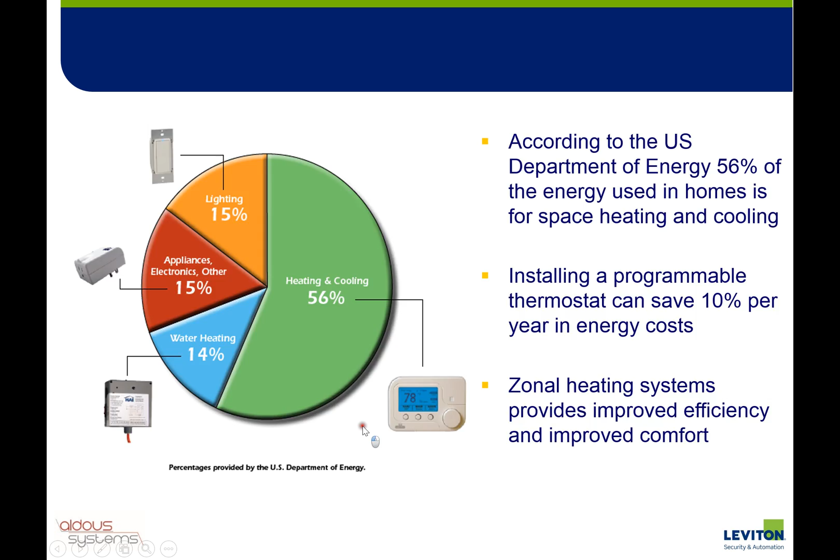With the Leviton system, we can pretty well cover any type of heating solution, from underfloor heating, radiators, air conditioning, and regardless of the type of heat source, be it a traditional gas or oil boiler or air source or ground source heat pumps. So it's very flexible, not come across a situation yet that we're not able to cope with. And what's also very nice is we have a really good solution both for new build and for retrofit, where you can actually fit this in existing properties without the need to run lots of cables and replumb the place.

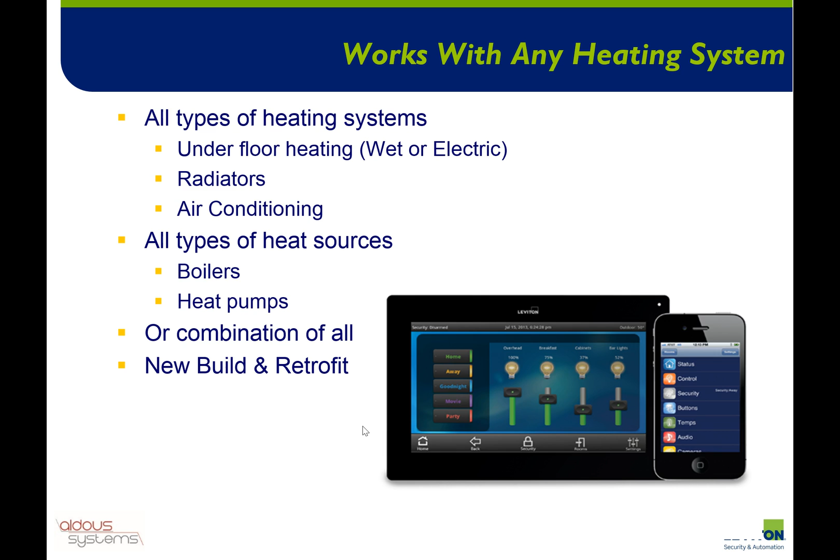So we're going to go through a couple of different scenarios here. First of all, we're going to look at underfloor heating, which is the most common for any sort of new build or extension, or you may find some projects have got a combination where maybe a large extension is being put in and underfloor heating is used in the new bits, and you've got radiators in the old bits, and obviously you can mix and match these different scenarios as required. And if you do that, you still present the user with a common user interface, either from the smartphone app or the touchscreen, regardless of what technology is being used to heat that zone. It gives the user a common look and feel, which is nice.

So focusing on underfloor heating, typically we'd use this RC1000, which is this device here. It really is a complete energy management module, including a thermostat and timer clock. Typically that's located within the manifold cupboard, adjacent to the manifold, and can control the manifold actuators directly. There is a 24 volt AC output on the back of this unit, and if you stick with 24 volt AC heads on the manifold, you can wire it directly. All manifold manufacturers offer 24 volt AC or 240 volt AC heads on the manifold.

Most UK plumbers will naturally go towards 240 volt heads or actuators, so you need to get in there early and make sure the underfloor heating company use 24 volt AC to make your life as easy as possible. If you have got 240 volt heads, it's not a big deal. They are extremely inexpensive items. Just to whip the 240 volt ones off and replace them with the 24 volt ones is easy to do. It doesn't require draining down the system. They are external to the water containment. They just literally unscrew. Really easy to do.

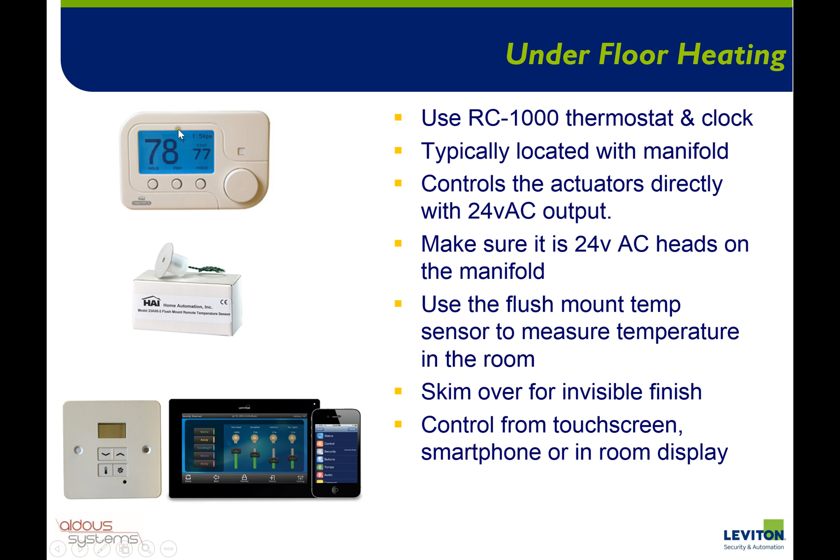And then, of course, individual room control can be gained from the touchscreen or the smartphone app. Or if you do want a temperature display in room, then we have got this temperature display faceplate available in a number of finishes, and this can show you the current temperature, and you can adjust the heat set points and change modes and that sort of stuff on the RC1000. And again, that wires with Cat5 back to the main RC1000.

Looking at wiring here, so here you can see this is my underfloor heating manifold down here, and it's obviously a 4-zone manifold, so there's 4 actuators, and you mount the RC1000s above the manifold and wire directly off the back of the RC1000 onto the actuator to be able to open it and close it.

Obviously each RC1000 has current temperature and a heat set point, and when the current temperature goes below the heat set point, it applies 24 volt AC and the actuator opens and allows hot water to flow in the underfloor heating. And when the current temperature reaches the heat set point, then it closes the actuator and stops the hot water flowing under the floor. So that's fairly straightforward, one of those for each zone.

And the RC1000s cable back to the Omni controller. It's actually on a bus network, so one Cat5 from the controller to the first RC1000, and then you can daisy chain them, or they can all star wire back and they all go to the same terminals. But when they're all in a row like this, it's simple just to run one Cat5 to the first one and then daisy chain them across. Obviously, if you've got multiple manifolds, say one on each floor, then just run a Cat5 to each manifold cupboard.

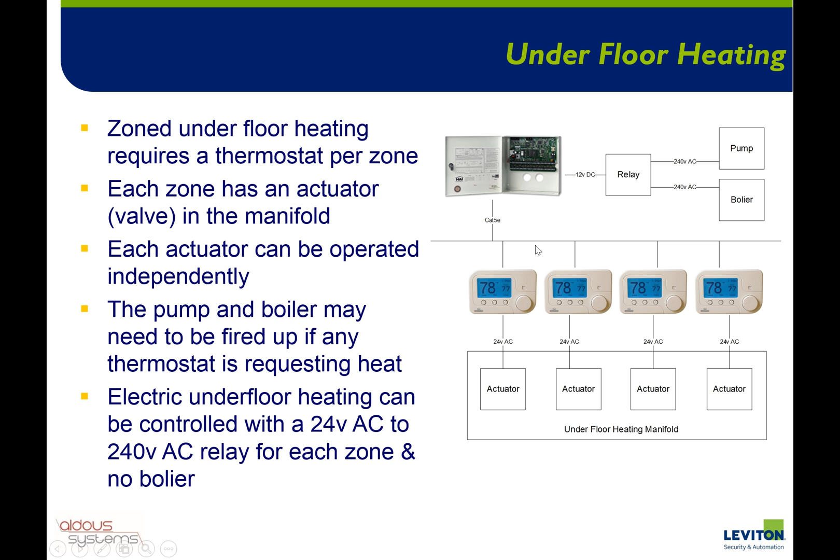Going to talk now about simple, perhaps more traditional heating with radiators. So if the house has basically just got a boiler and say 8 radiators, then again you can use the RC1000 to control this and measure the temperature. Typically in that scenario you might mount the RC1000 in the hall or the landing, and it's got its own built-in temperature sensor, and you don't need the remote temperature sensor. You can just have the RC1000 on the wall, and it's measuring the temperature, and the relay can be used to turn the boiler off and on.

However, if you do want to hide the RC1000 in a cupboard somewhere, then absolutely no problem using the remote temperature sensor. And indeed, you could actually have up to 4 remote temperature sensors wired back to one RC1000, and it'll take an average across all 4 of them. Let us know if that's what you want to do, and we can tell you how to wire that. It basically involves wiring 2 in parallel, and then each leg has 2 sensors, so you can get 4 of them dotted around the house, which is quite a nice little feature.

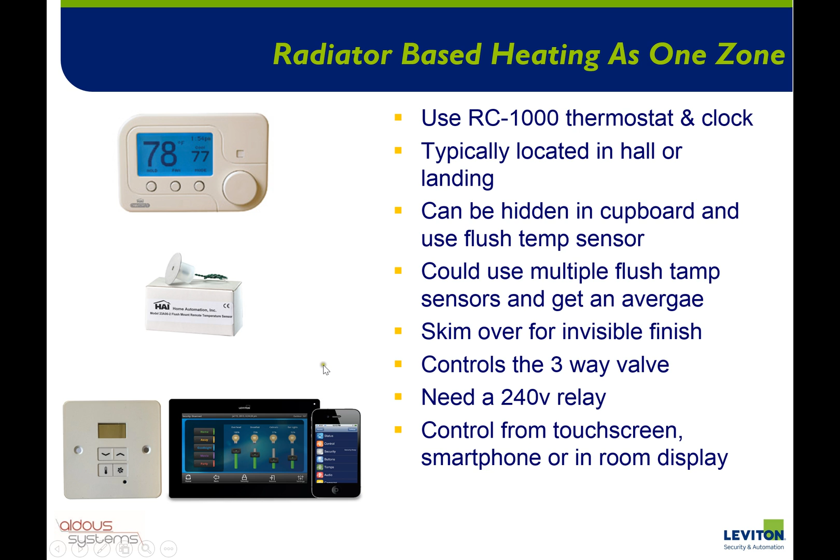So this is kind of a wiring diagram showing how you do this. Most typical installation of a radiator-based heating system has one of these things here, which is called a three-way valve. Makes our life quite a lot easier actually, because you simply put 240 volt on one of the cores of this cable, the valve opens, and then the way it's normally wired by the electrician is there's an end switch which then livens up the pump and the boiler for us. So we actually haven't got to worry about the pump and the boiler. That happens automatically as a result of conventional wiring.

If you speak to the electrician, he'll know exactly what you're talking about. Most electricians have wired in central heating systems, so you just need to put a relay between the 24 volt AC output on the RC1000 and the 240 volt, to be able to switch a 240 volt through to the three-way valve, and once that's been livened up, your boiler and pump fires up, and then hot water flows through the radiator. Of course, when the current temperature reaches the heat set point, the relay switches off and the valve closes and the boiler and pump shut down. So that's pretty straightforward.

And again, as I mentioned earlier, you may have a property where you've got a combination of both, where you may have radiators in one area and underfloor heating in another area, and that's absolutely not a problem. Just combine the two together.

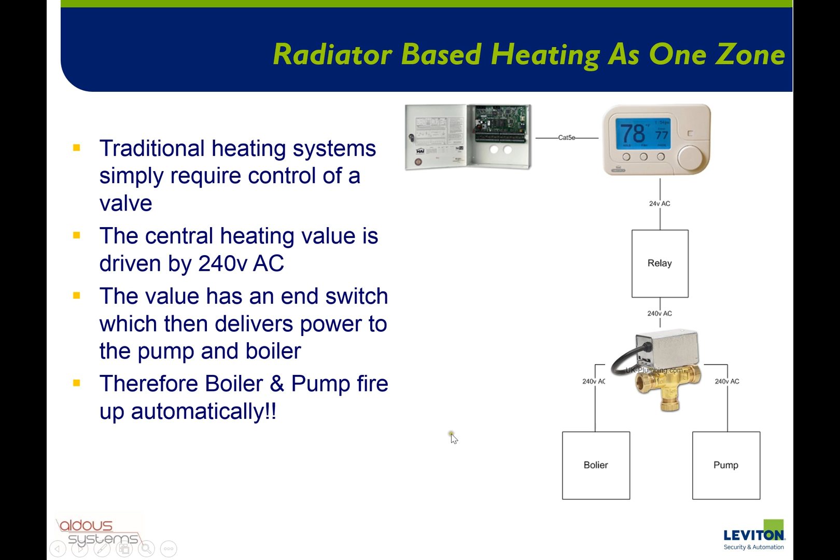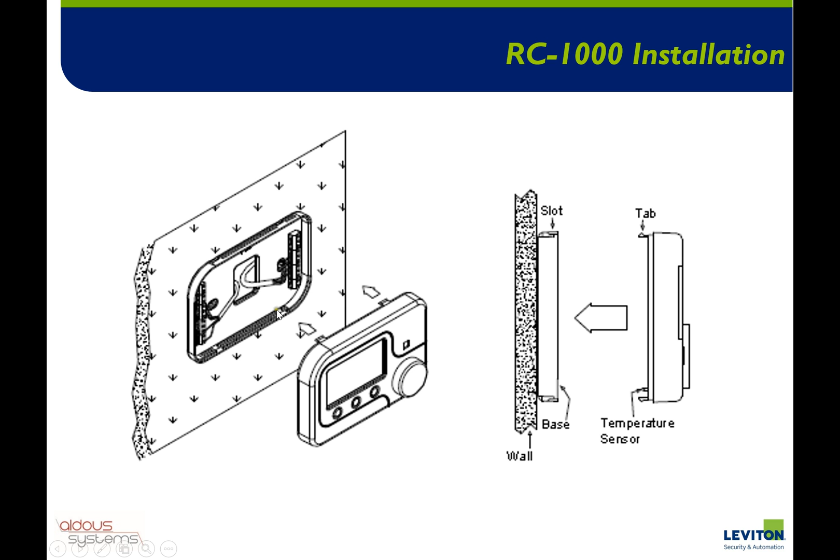The RC1000 itself, from a physical installation point of view, snaps open into 2 bits, where you have a back plate here, the wiring center as it were, that you mount on the wall, and then the front bit will snap over the top of it. And there are 2 connection blocks on the back plate, one on the left and one on the right. The right-hand connection block is used for connecting back to the main controller.

I mentioned in the introductory video that all the thermostats, up to 64 of them on an Omni Pro 2, you lose 1 zone and 1 output on the controller. So it's three conductors that provide all the telemetry from the thermostats back to the controller, so you can go from the controller to the first thermostat and then daisy chain each one, and each thermostat has a unique ID that you set from the menu. So if you've got multiple thermostats, make sure you set the IDs accordingly.

The left hand screw down terminal block on the RC1000 back plate requires 24 volt AC power on pins 1 and 3. That powers the thermostat, and then you've got pin 6, 7 and 8, and really we mainly tend to use pin 6. Basically pin 6 goes live when the thermostat needs heat, and it's switching a 24 volt AC through to pin 6.

So pin 6 can go to your relay to provide 240 volt to the three-way valve in the radiator example, or pin 6 can go to the actuator to liven up the actuator on the manifold, again when the thermostat needs heat. Obviously it's 2-wire, it's pin 6 and the common to make an AC circuit.

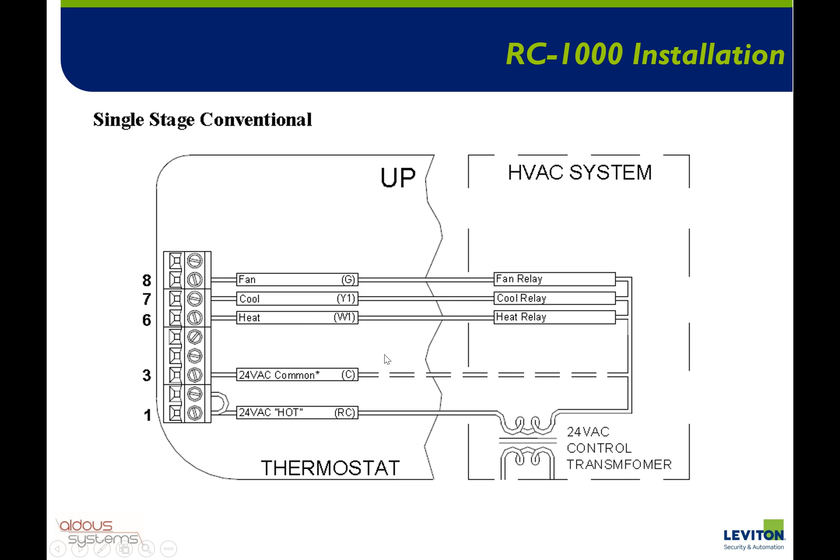Okay, now we're going to move on to retrofit solutions, which I find quite exciting. This gives you the opportunity to provide app-based and intelligent heating control in existing properties without having to rewire or replumb them. This thermostat here can really just be a complete one-for-one replacement of your traditional thermostat. Normally in most properties there's a little thermostat of some form on the wall, and that's got a little 240 volt switch in it, which switches a live feed to that three-way valve we were talking about earlier. You can pull that off the wall and replace it with this thermostat.

This has also got a 240 volt relay in it. Mount it on the wall, wire the switch live into the back of it, and you can set the heat set point, and when the current temperature falls below the heat set point, that relay becomes live, switches 240 volt to the three-way valve, and your boiler and pump fires up and heats up the house. When it gets to temperature, relay goes off, pump and boiler go off. Very, very simple. The nice thing about it, of course, is it has Zigbee wireless. Now, Zigbee is a very robust wireless technology, which allows it to communicate back to the Omni controller.

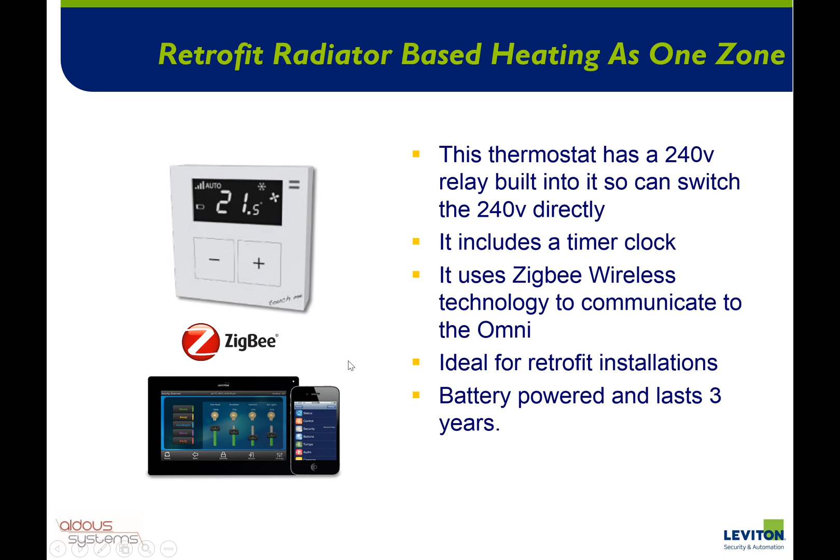Okay, just looking at wiring, then here you can see our three-way valve again with the boiler and pump, and again, as I mentioned, all we're doing is applying the 240 volt we need to the three-way valve. 240 volt on, pump and boiler fires, radiators heat up, and we use wireless to talk back to the Omni to give you control of that thermostat from smartphone or touchscreen, and from a programming point of view. Great little retrofit solution, easy to put in anyone's house, and every home should have one.

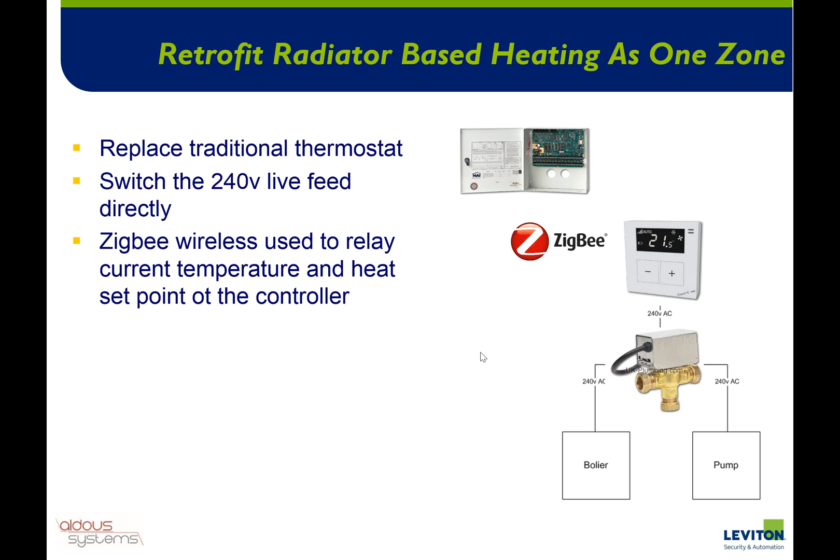Now, if you want to get a bit more efficient and improve the flexibility of the system, then you really want to zone the system up. Because obviously the previous example is treating the whole house as one zone. Your heating's on or it's off. And it doesn't give you room by room control. This retrofit solution does. This uses a Zigbee wireless radiator valve, also known as a TRV, a thermostatic radiator valve. Basically, you can fit these to the radiators.

You may have seen TRVs before, where you have a little white knob on the end of the radiator that's labelled 1 to 6. And they're not particularly useful or user-friendly. They tend to be fairly binary, to be honest. Sort of 2 and below is off, and 2 and a bit and above is kind of on, and there's no real individual control there.

Well, you can actually just unscrew those and screw this radiator valve on. Doesn't require you to drain the water down. Again, it's outside the water containment of the radiators. You unscrew it and then screw this guy on. Again, it contains a couple of batteries, which again last about 3 years. And the device will connect via Zigbee back to the Omni controller and show up as a thermostat. It'll give you a current temperature reading for that room, and of course a heat set point.

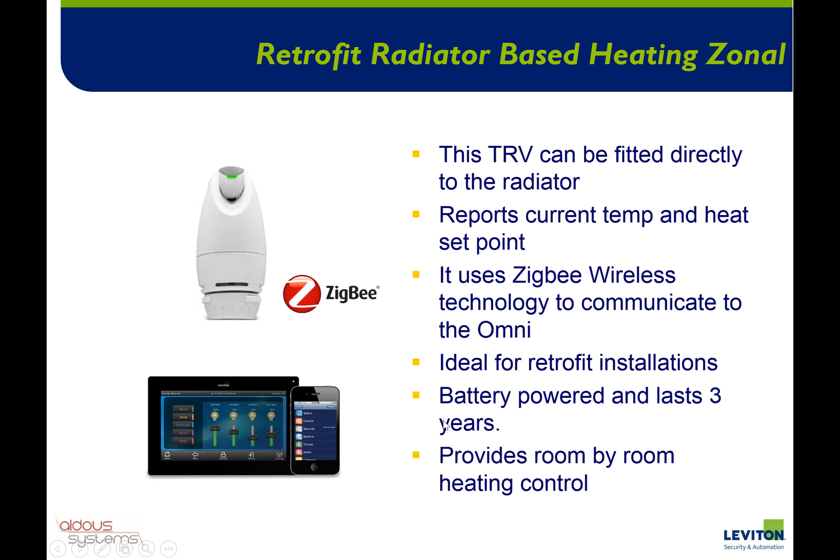And if you have guests come around, then you can just ask them, what temperature would you like your room to be, and pull out your phone and set the temperature accordingly. So brilliant solution. Big fan of this. Obviously you need a TRV for each radiator. So 8 or 10 radiators in the property, you fit a TRV on each one.

And it uses Zigbee to talk back to the controller. And now, of course, we do still need to turn the boiler off and on as required. So again, we use an output into a 12-volt relay to control the pump and boiler. And then if any of the TRV's current temperature is below the heat set point, we turn the boiler and pump on. And of course that water will only go through the radiators where the TRV is open, so it's only going to be sending the hot water to those locations that need it.

And of course when all the TRVs have reached the heat set point required, then they will close, and you can obviously turn the boiler and pump off. No need to run the boiler. Great device. They run very silently, so no problem putting them in bedrooms. They don't make a whining noise or anything. You almost have to put your ear hard up against them to hear the little motor opening the valve and closing it.

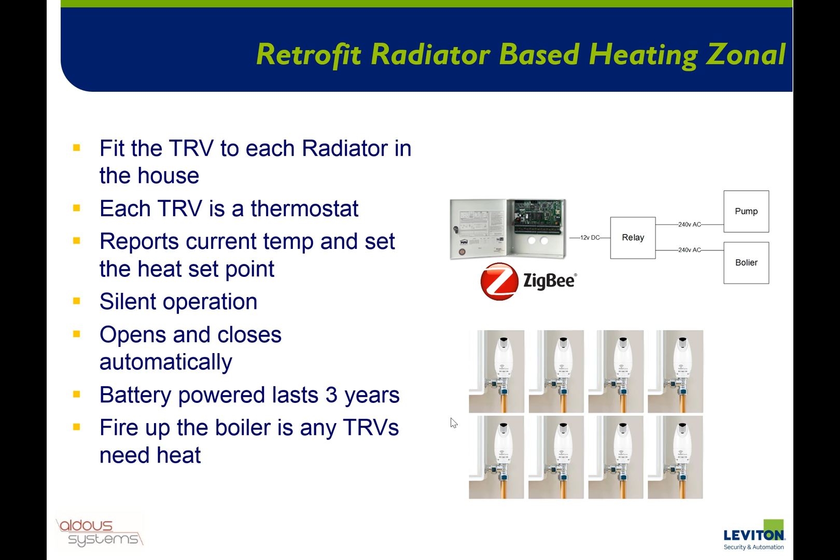Yeah, brilliant solution. You can probably tell I really like this solution. It's great, and definitely would recommend using this in as many situations as you can. Certainly, even if you just sell an Omni as an intruder alarm, there's a great upsell there. You can speak to the customer. Do you want zonal heating control, also controlled from the same smartphone app that your alarm system is controlled from? Who wouldn't want that capability?

Still in the retrofit space, you might find it difficult to get a cable from where the Omni is to where the boiler is. If that's the case, not a problem. We've also got a Zigbee wireless 240 volt relay. This will allow you to apply the 240 volts to the boiler where it needs to be to turn the boiler on without having to run cables to it.

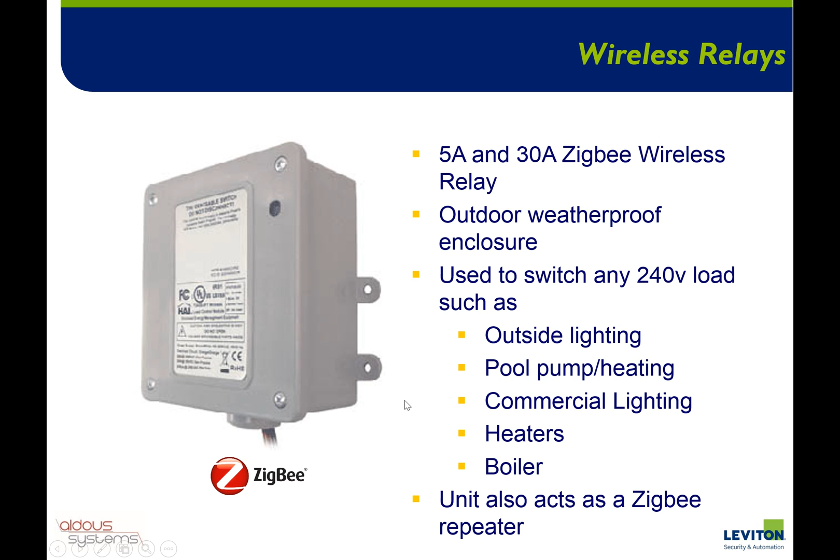We have two versions of this, a 5 amp and 30 amp version. Obviously a boiler isn't going to draw much current, it's just a switch, so the 5 amp version will be fine for that. And basically it sits on the Zigbee network. This is a powered Zigbee device, so this will act as a repeater as well. But other applications, outside lighting, pool pumps, pool heaters, commercial lighting, commercial heaters, anything where you need to switch 240 volt and you can't get a cable to it is where you can use the Zigbee relay. So very useful piece of kit for any of those applications.

I mentioned that powered Zigbee devices are repeaters. So our wireless battery-powered thermostat and our wireless battery-powered TRVs are not repeaters. That would drain the battery too much. They're known as endpoints. If you have a large property and you need to boost the range, then this little chap is very useful. It is a Zigbee repeater. So wherever you've got a power socket, you can plug one of these in and it will repeat the Zigbee signal, giving you larger range.

So if you've got a TRV that's just too far away from the main controller, pop one of these in a power socket somewhere between the two and it will repeat the signal. And what will happen is multiple TRVs will find the repeater and then hang off of the repeater, which makes the network more efficient and more robust. And it's also a 13 amp relay as well. So anything you want to switch off and on with this can be controlled from the Omni, such as, for example, lights, lamps.

I know certain people use them to isolate things like tumble dryers and washing machines that do get quite hot and have been known to start fires. So by putting one of those on the tumble dryer, when you arm the alarm at night in night mode, you can kill the power to the tumble dryer so that it can't possibly burst into flames.

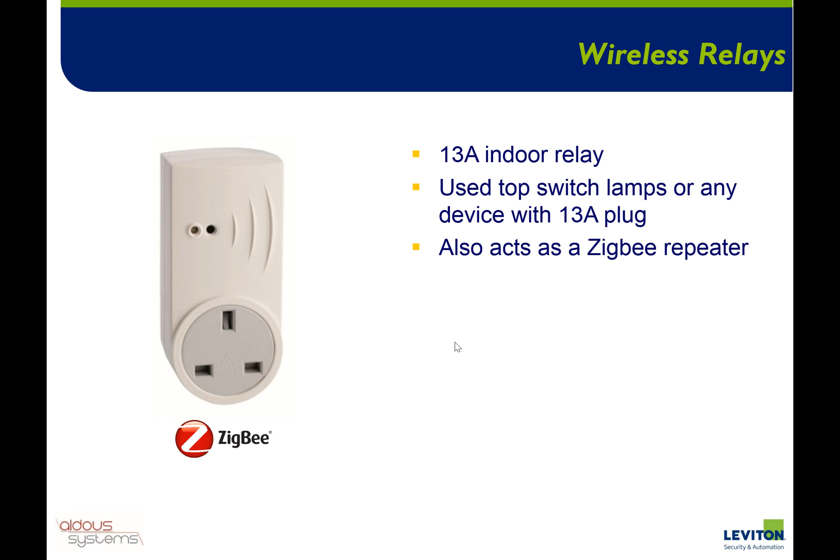You can locate it wherever you like, get it nice and central in the house. Over a Cat5, you can go quite happily up to 100 meters because RS485 goes quite a long way. So you need one of those plugged into a serial port. Set the serial port to ZIM. And then you've basically Zigbee enabled your Omni for any of those Zigbee devices you want to enroll into the system.

I mentioned air conditioning earlier on. We absolutely have the ability to integrate air conditioning systems as well, very easily using the Coolmaster. The Coolmaster device plugs into one of the serial ports on the Omni, and allows any air conditioning unit to show up as a thermostat. So again, it gives you a current temperature, and a heat set point or a cool set point. Most air conditioning units nowadays can heat and cool, so you can control them easily and seamlessly from the Omni.

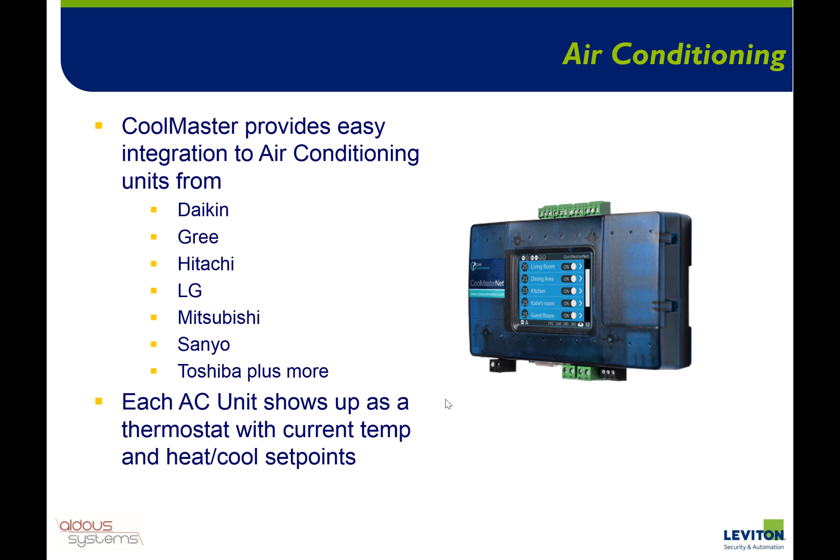There's a 2-wire bus that runs between air conditioning units, and wires into the Coolmaster, and the Coolmaster connects via a serial cable to the Omni controller. And then you can enroll each device into the system as a thermostat and control it as easily as that. So you literally just need this one piece of hardware, and it covers pretty well every make of air conditioning system out there. So really easy to integrate.

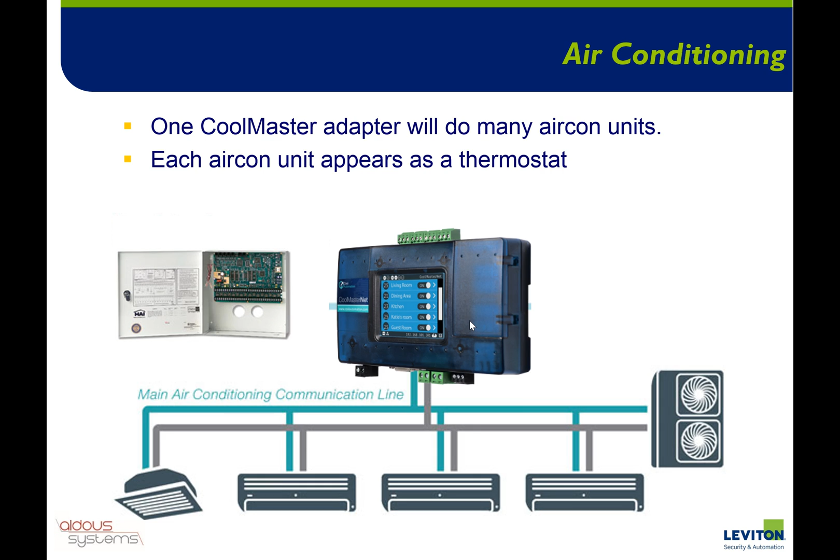Additionally, we have some other items I thought I'd just mention, so you get a full view of everything. We do have a temperature sensor. This can either go indoors or outdoors. It's quite nice to actually fit one of these outdoors. Stick it under the soffit, so it's not in direct rain. But the printed circuit board is coated, so it's not going to go rusty or go green or anything.

And that can give you the ability to measure the outside temperature, which is quite nice to show on the touchscreens. The customer can see the outside temperature, and indeed you may make some automation decisions based on the outside temperature. So not a bad idea to throw one of those into a project. But as always, there's more than one way to do something. I have known installers fit the temperature sensor in each room for temperature measurements in each room.

It's a lower cost device than the OmniStat, which is the RC1000 we talked about earlier. No reason why you can't use this if budget is a real concern. Obviously you can't make it invisible, and there's no display on it, but it does give you a current temperature, and you can set a heat set point, and then you could use outputs on the controller to open and close the manifold heads. There's no one solution fits all, so you could have a combination of things. I have known installers use this quite successfully for a budget heating control solution, because they're relatively inexpensive.

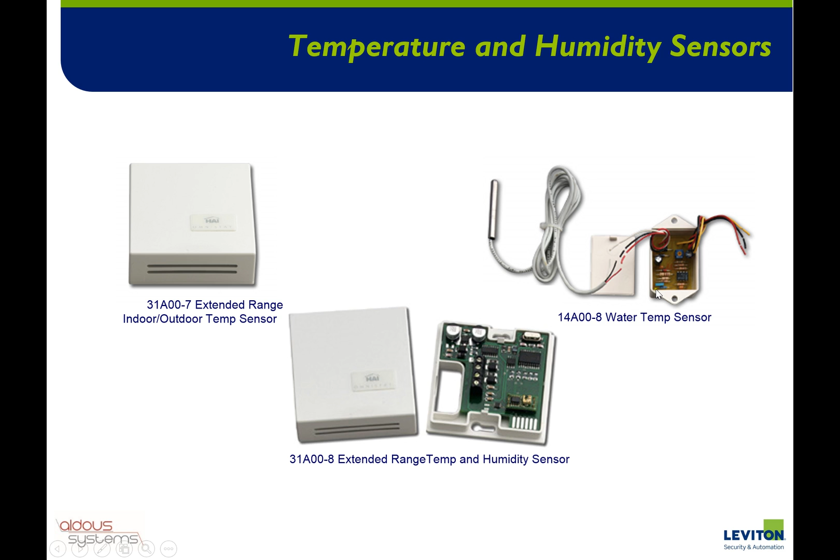Okay, we're going to have a quick look at PC Access now and what's involved in programming the system for your temperature and energy management. So if we're looking at the Setup tab over here, if I click on Thermostats, really all I have to do is name my thermostats.

So here you can see I've got 6 thermostats in the project: kitchen, dining, lounge, study, hall and upstairs, and all I've done is I've clicked on here and typed in its name. That's all I've had to do to tell it basically it's a thermostat. The system basically, when it sees a thermostat with the default name, it assumes it's not being used. So by changing the name is how you tell the system there is a real thermostat there.

Voices, I can give the thermostat a voice as sort of demonstrated before just by doing that. This is really a bit of legacy, to be honest, where people use the telephone dial-up facility to control the system. This is where you may say, press 3 for thermostats, and then it reads out, press 1 for the kitchen thermostat, press 2 for the dining room thermostat. But no one really tends to use that voice dialing capability anymore because we have the smartphone app. But just in case you need to use that.

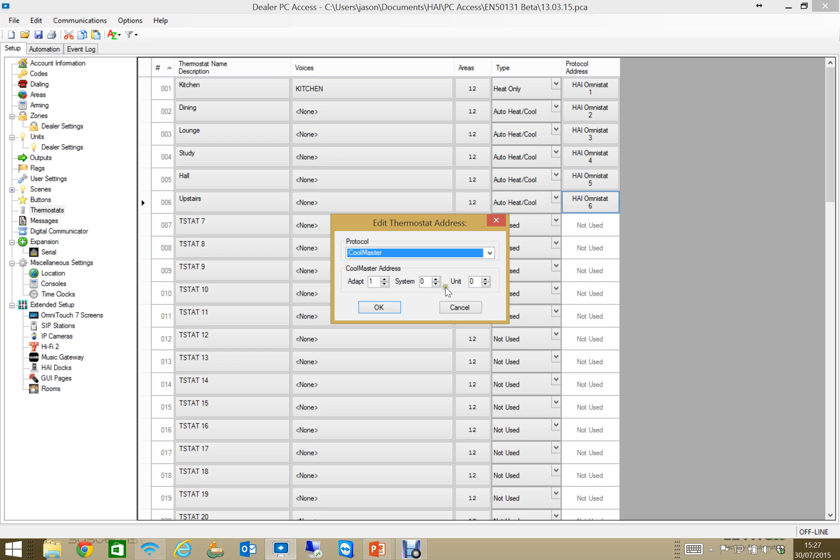If you are using Zigbee or the Cool Master, I'm just going to pop over to the serial ports. Don't forget, if you're using Zigbee and you've used a ZIM, you need to make sure you've set the ZIM to a serial port where the function is set to Zigbee. And if you're using Cool Master on that serial port, then you need to make sure you set the function to Cool Master on the appropriate serial port. And of course, you can have Zigbee and Cool Master using multiple serial ports.

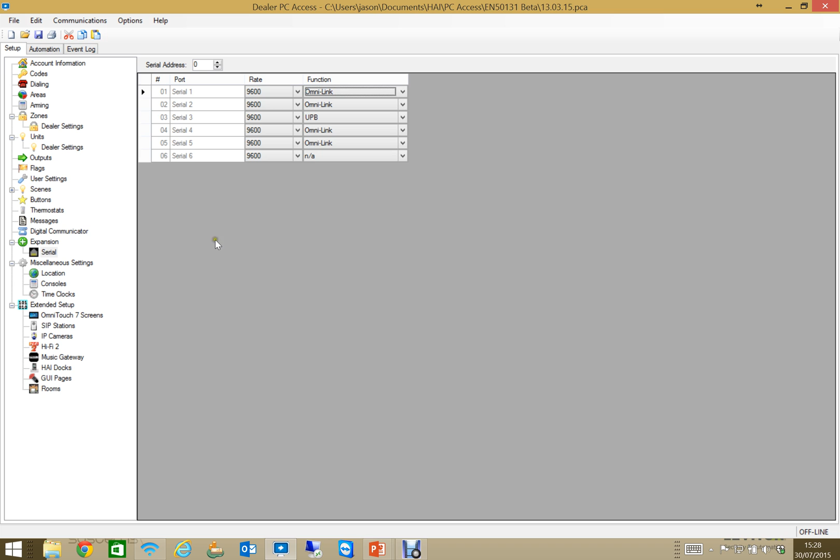Okay, we're going to look at a quick bit of programming now, because one of the things I said earlier was that when you're doing your heating control, you need to manage the boiler. And if any of the thermostats need heat, you've got to turn the boiler on. So how do you do that? I'm just going to jump into automation programming and add some programming to show you how that's done.

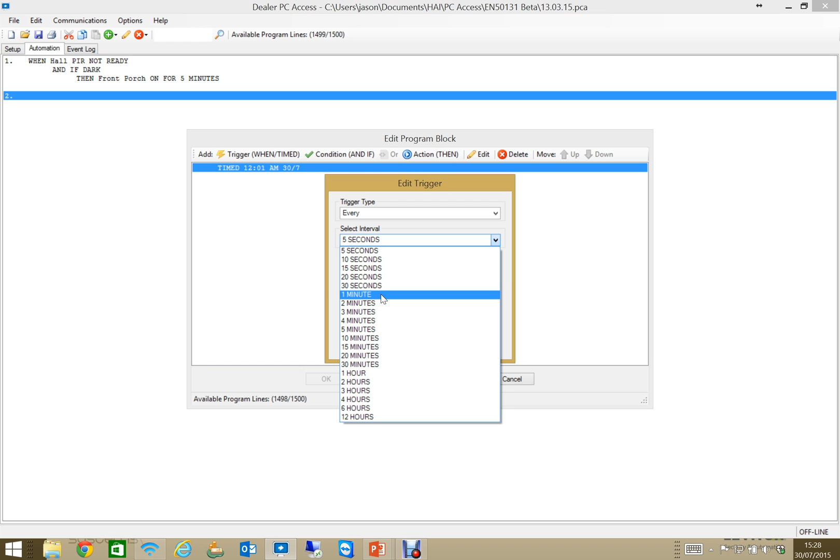As with all programming, we start with triggers. Now with this one, I'm going to use a cheeky little trigger, which is very handy, called every. We basically have the ability to do something every period of time. So I'm just going to say every minute.

And what I'm going to say is every minute, check my thermostats, see if any of them need heat. If so, turn the boiler on. That's what we're going to do. So the trigger is every minute. My condition:

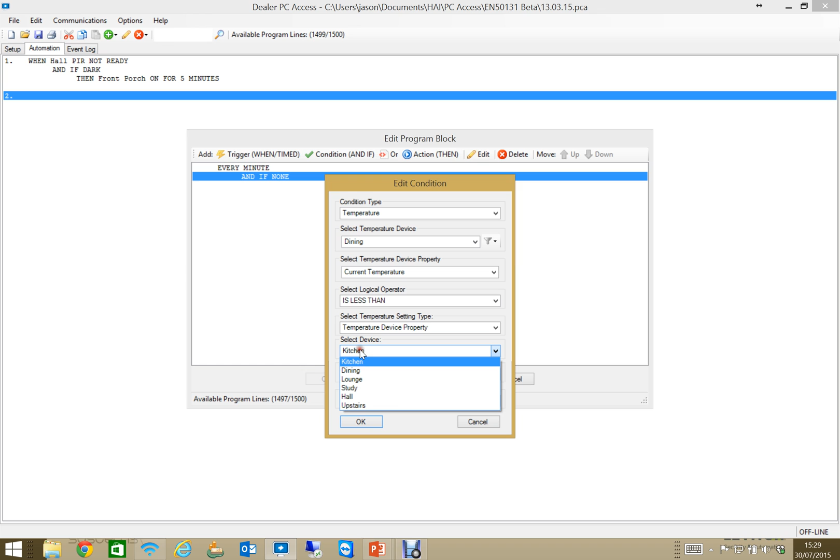I can go to temperature, select the first thermostat, which is the dining room, and if the current temperature is less than, now here I've got specific properties, and temperature device property is what I want, and it's the dining room thermostat we're doing here. So if the dining room thermostat current temperature is less than the heat set point, let's say by 1 degree. So if the dining room thermostat current temperature is less than the dining room heat set point, then we want

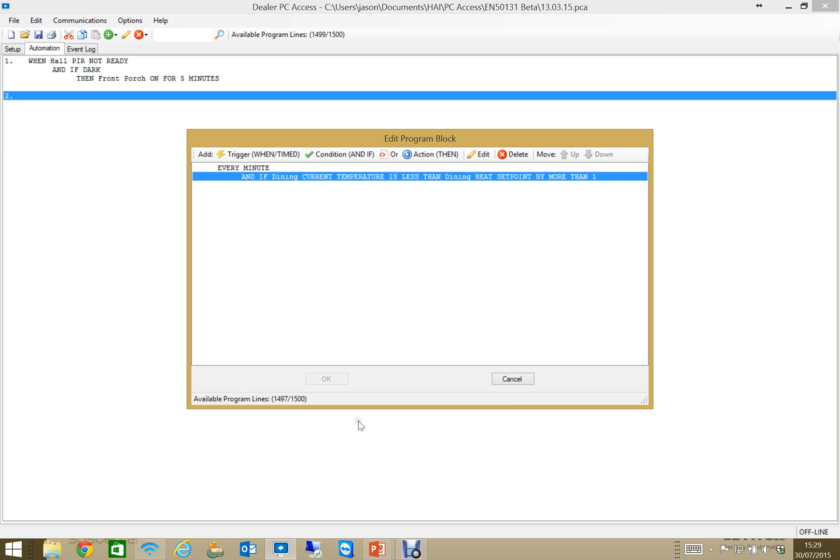the boiler on, right? But I want to do that for each of my thermostats, and it's an OR. So I've clicked the OR button to put an OR statement in here, and now I can do the next one. So temperature, hall, current temperature is less than the hall heat set point by 1 degree.

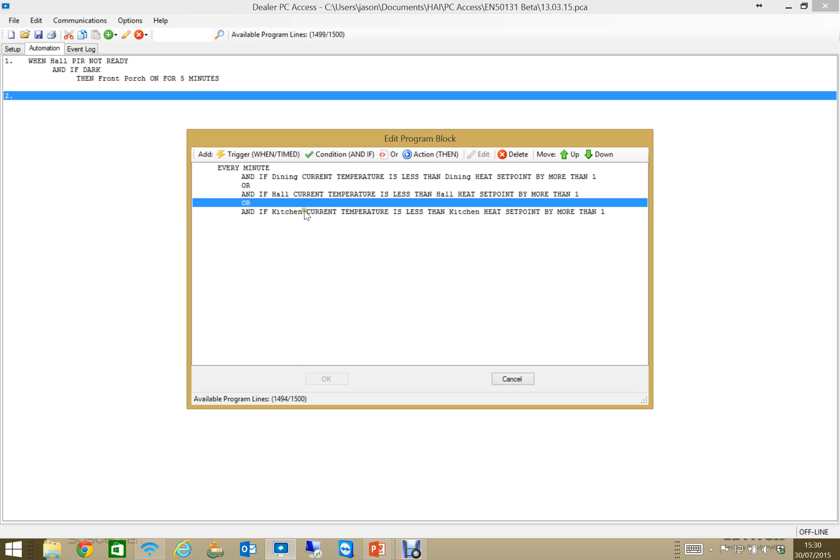And if the temperature for the kitchen current temperature is less than the kitchen heat set point by 1 degree, well, obviously you can choose what you want to do there. And I forgot to put my OR statement in here, so I'll just pop that in afterwards. And there's my OR statement again. I'll just do one more for the purposes of this exercise.

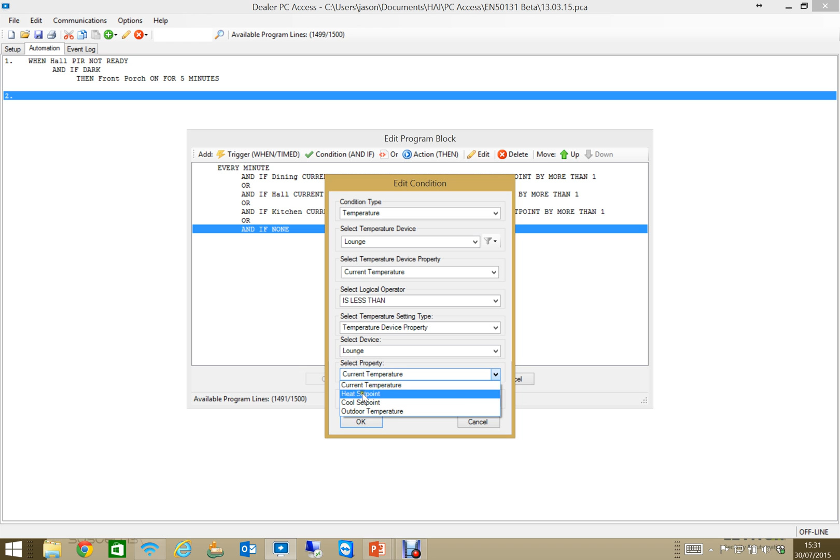Temperature, so we've done the dining room, done the hall, done the kitchen, we'll just do the lounge. Current temperature is less than the lounge heat set point by 1 degree. The action is going to be to turn the boiler on. I've got the boiler under an output. So I've got one of my outputs through a 240 volt relay, and there it is. There's my boiler. I'm going to turn the boiler on.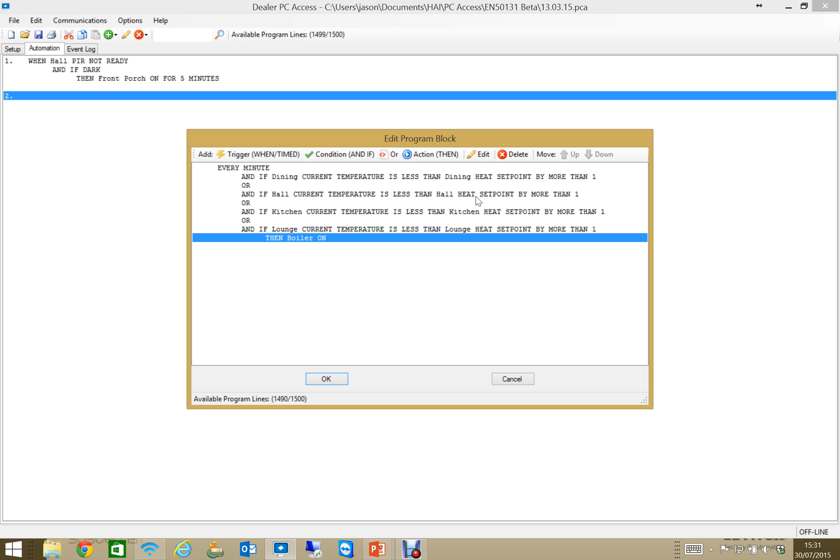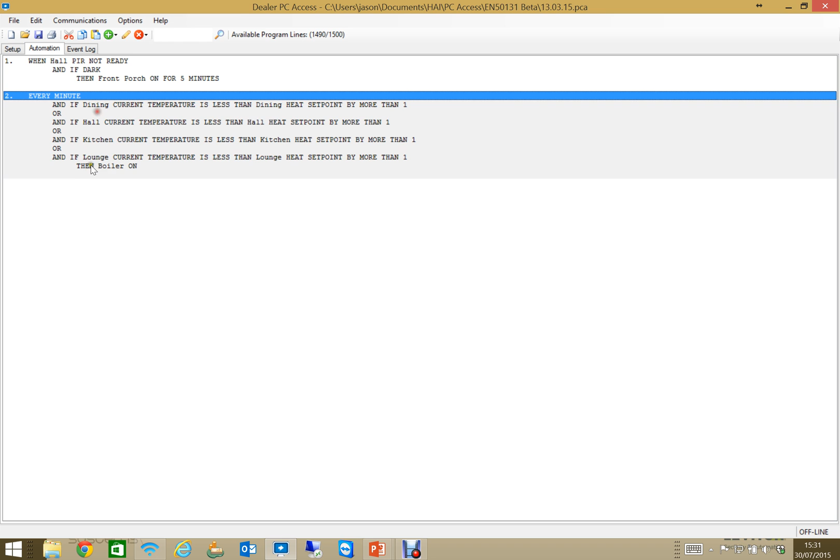So every minute, if the dining room, hall, kitchen or lounge current temperature is less than their associated heat set points, then turn the boiler on. And obviously I can customize those heat set points per zone, giving me total zonal control of the property. That's great, that turns the boiler on. Now I want to turn the boiler off conditions as well. So I'm going to copy that, select down here and go paste, make my life a bit easier.

And this one, now, to turn the boiler off, all of the thermostats must be at the right temperature. It's not an OR statement anymore, it's an AND statement. So I want to get rid of all of my ORs because every thermostat must be at the temperature it needs. So if I go to the dining room, current temperature is greater than the dining room heat set point.

And now I'm in the hall, current temperature is greater than the hall set point. And kitchen, current temperature is greater than the kitchen heat set point. And the current temperature is greater than the lounge.

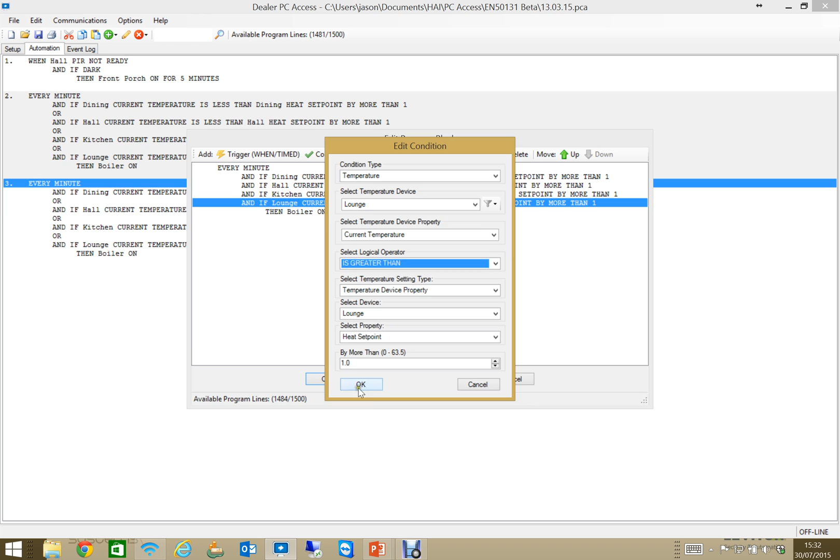Okay, so now we're saying if the dining room, hall, kitchen and lounge current temperatures are greater than the desired heat set point, then don't turn the boiler on. No, we're going to turn the boiler off. There we go. So with those two bits of logic, I'm now able to control the boiler based on what my thermostats require.

So hope you followed that. If you want to rewind and watch that again, feel free to do so. But it's pretty straightforward. Of course, I would need to connect to the controller and then write that programming down to the controller for that to then take effect. Do make sure you test the system properly to ensure that it's all working correctly.

Certainly, especially if you're doing zonal control, go to each zone, set all the set points down low on all the zones bar 1, and then crank that set point up above the current temperature. See that particular manifold actuator open or the TRV open. Make sure it's working correctly and that zone heats up, and then you can turn that one down and turn the next one up and check them all individually and make sure they're all working correctly.

There are mechanical items in here with the actuators and the TRVs operating the valve on the radiator, so you do need to make sure all those things are operating correctly, and indeed that the boiler is coming off and on correctly. Of course, you can monitor the boiler status by looking at the boiler output from the smartphone app or from the status tab of PC Access, and you can see it's doing what it should be doing.

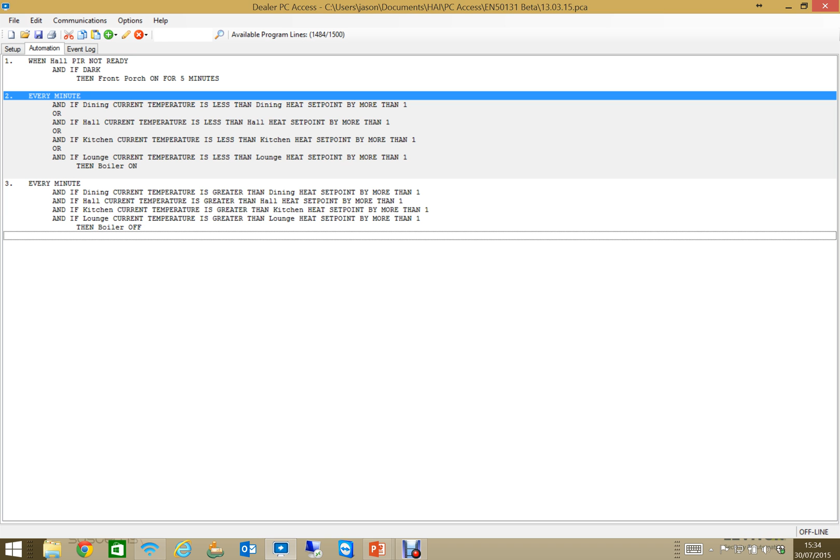Okay, well, that pretty well concludes this module. I hope you found that useful.